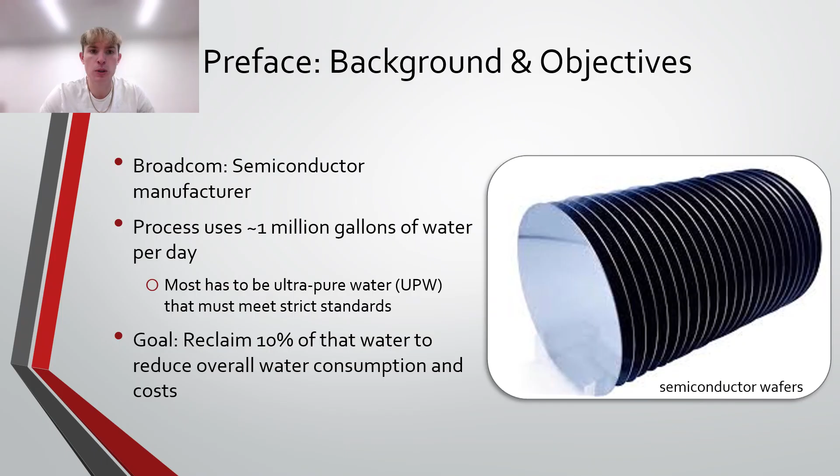Ultra-pure water must be used in most of these tools due to the high specification requirements of the semiconductor wafers, but it quickly becomes wastewater due to the presence of various contaminants either from the wafers themselves or other chemicals used in the process. The end goal for our team is to use the waste streams from the fabrication plant to reclaim 10% of the water in the process to reduce overall water consumption and costs.

Hello everyone, my name is Karina Zita. I'll be discussing the market and competitive analysis for our project. Ultra-pure water is one of the many main components utilized in the semiconductor fabrication process for the purpose of rinsing off any remaining residuals left behind on the wafer. Due to the semiconductor market growing over the past 2 years, the demand for ultra-pure water is also rising with the prediction to double by 2035.

The cost of production for ultra-pure water can be very expensive, as well as energy intensive. To mitigate these challenges, a wastewater reclamation system design will be implemented into Broadcom's ultra-pure water process. By increasing our water reuse, we are striving to stay competitive with top semiconductor industries, such as Intel and Texas Instruments, as well as reduce environmental impact.

Hello, my name is Caitlin Brennan, and I'll be walking through the team's schedule and budget for the past year. After initially convening and meeting with all of our advisors, the project scope and timeline were defined in September of 2025. Soon after, we moved into completing a market and competitive analysis where we looked into the semiconductor and ultra-pure water industries to determine that the project would provide a competitive advantage to Broadcom.

In November and December, the process was synthesized and described, which meant determining first which streams were viable options for reclamation, and second, how best to repurify them. Right after winter break, we jumped right into optimization and sustainability analysis in February and March, followed by a safety analysis, and following those results, controls design. Our presentation at E-Days and the subsequent submission of our final report will wrap up the project nicely.

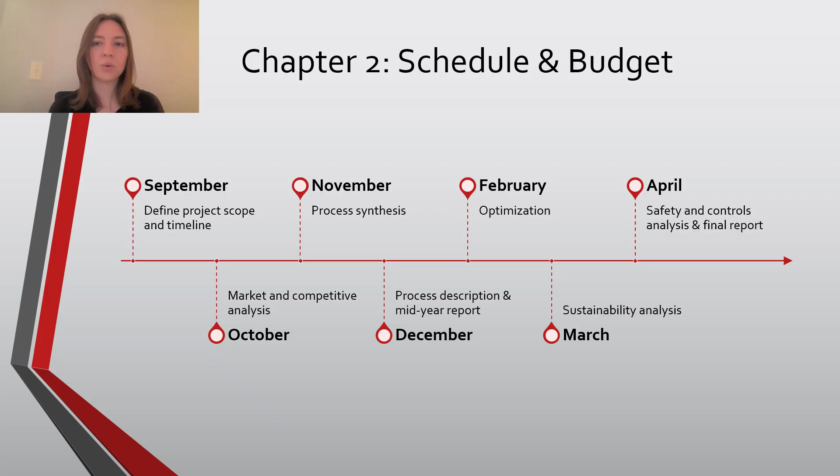We were initially provided with a $500 budget from CSU to help us achieve our goals, and Broadcom graciously offered to supplement where necessary. We didn't end up tapping into the resources CSU provided since the project is largely theoretical and design-based, but Broadcom did purchase and attempt to install a flow meter to assist in gathering flow rate data for our models. Unfortunately, with inconsistent flow through the pipes, an accurate reading was not able to be obtained from the meter. In conclusion, the budget provided by CSU remains untouched.

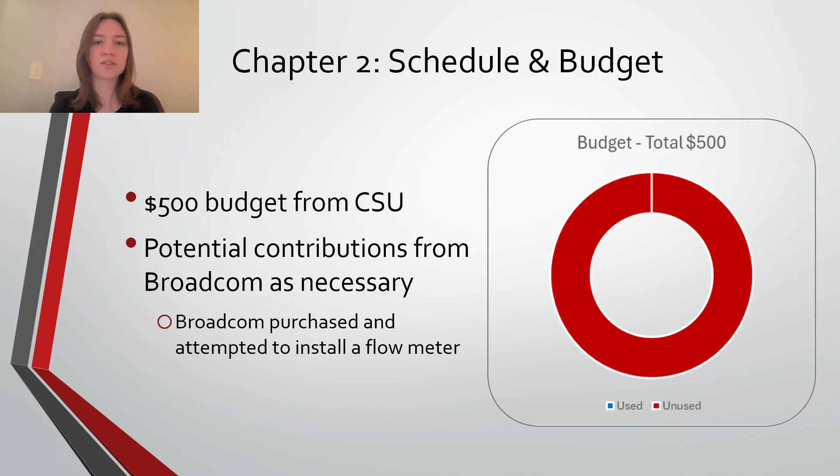Hi, I'm Adam Davis, and I'm going to talk to you about how we came up with our process for Broadcom. Initially, we were given a list of a bunch of waste streams to choose from to see which ones had the highest flow rate and which ones could be realistically treatable. From that, we chose 3 different streams, one that's an acid waste, one that's a copper waste, and one that is isopropyl alcohol. For the acid waste stream, we decided that we would use a neutralization reaction with calcium hydroxide,

where we send the acid water to a CSTR, neutralize it in there, and then send it to a clarifier where the waste will get settled to the bottom, and the UPW will go back to the Broadcom facility for further polishing. For the copper stream, it was simple, just a simple ultrafiltration membrane to remove the colloids from the copper, and so the ions will then get removed in the polishing step at Broadcom's facility.

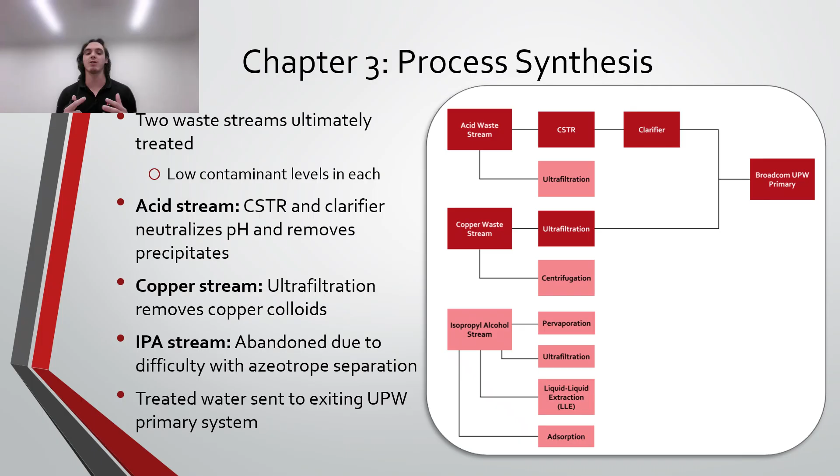For the isopropyl alcohol, unfortunately, we kind of had to give up on this idea because it became a very complicated process and there wasn't a lot of research done on how to separate the isopropyl alcohol from water in ways that we could feasibly do. So this is the actual design for our process from the 2 waste streams that we decided to move forward with, which is both the copper-rich stream and the acid-rich stream.

For both streams, they are going to initially enter a holding tank before they get pumped through to their treatment operation. For the copper, it goes into the storage tank, gets pumped to the UF, and then the retentate goes to the waste treatments, which would be like the sludge, and the permeate will then go to Broadcom's polishing step. Same for the acid waste stream. It goes into the storage tank, then gets pumped on through to the CSTR, where the neutralizer will then be added in to have the reaction happen, then is sent to the clarifier or settler tank, which will be cleaned out of the gunk, and the water will be sent to the Broadcom polishing steps.

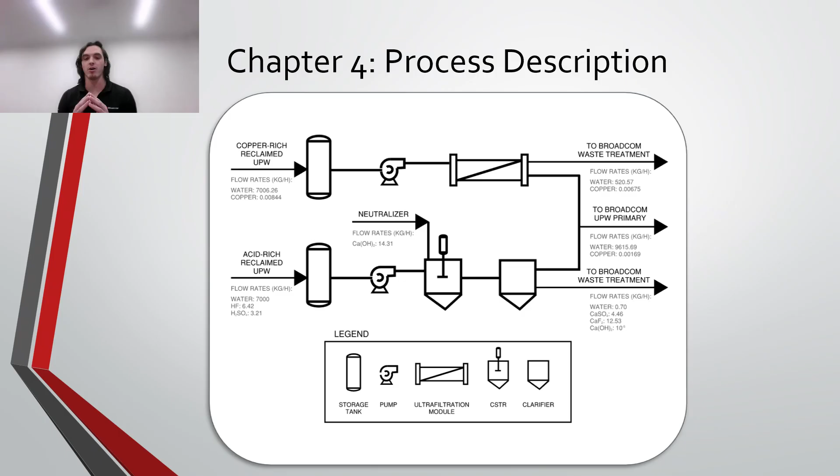My name is Peyton Musselman, and I will be going over optimization. Our main goals for optimization for the UPW reuse system were to increase efficiency and decrease cost. One of the first changes that were made was combining the two CSTRs into one larger tank to decrease cost, decrease the space requirements, and overall increase system efficiency.

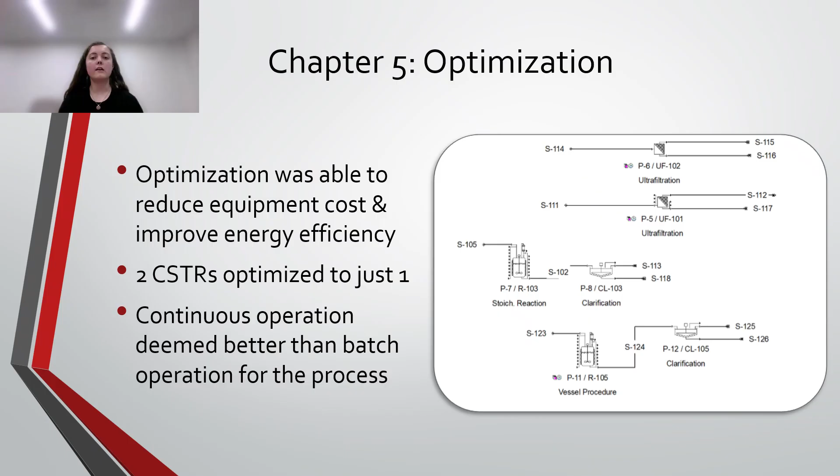The biggest change that was made was making the system continuous instead of batch. In the image shown, the first of each system is batch, and the second is the continuous operation. Continuous overall used less energy and thus lowered cost as a result.

For sustainability, we looked at the American Institute of Chemical Engineers' 7 sustainability indices, labeled on the radar graph below. They're the metrics that help break down the various areas of sustainability. A score of 1 is very unsustainable, while a score of 7 is the most sustainable a system can be with the current technology. The inner blue and outer orange lines show the UPW reclamation system before and after improvements to the process were made.

The main area of note is strategic commitment, as Broadcom currently has many policies in place that our system would hold to and thus would have a very high score for strategic commitment.

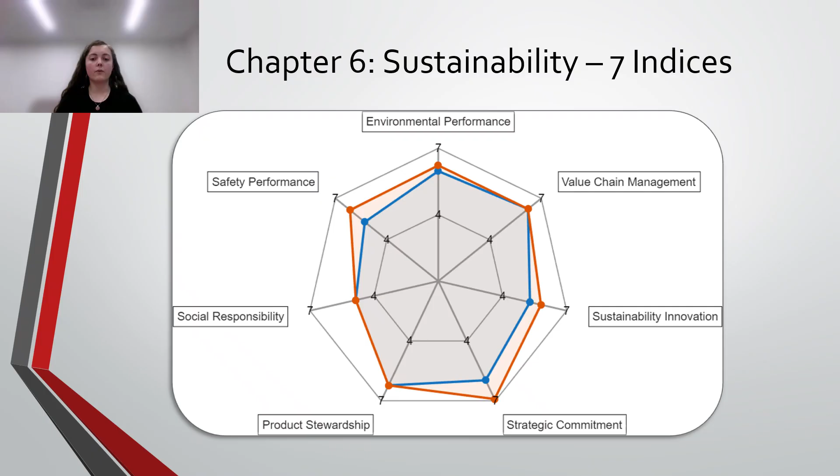Hi, I'm Jake Footit. The 3 pillars of sustainability give a more in-depth look into the core pillars of sustainability, which are economic, environmental, and social. This project shows little negative environmental impact, with the only carbon emissions coming from the power provided by the pumps and agitation, with no extra land being used to install the project.

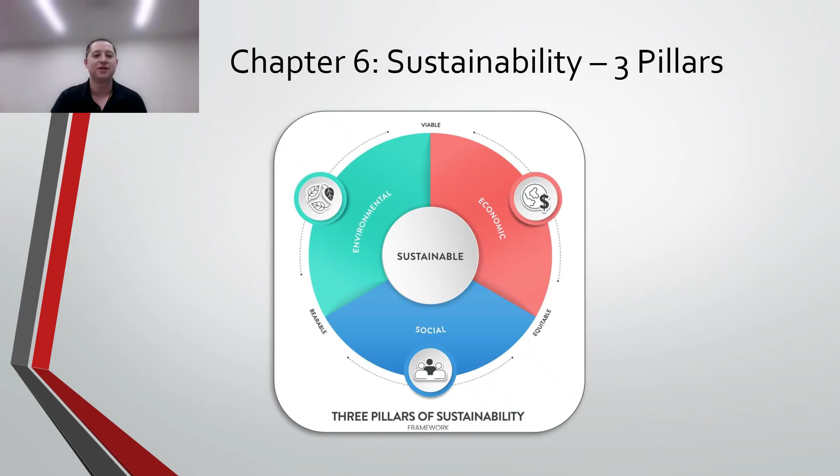This reclamation project does not negatively impact the communities surrounding Broadcom and will hopefully lead to jobs in the future. While further economic analysis is required, the financial upside of this project is near limitless, as there are many other streams that can be studied and recycled in the future.

Once again, my name is Caitlin Brennan, and I'm back to discuss the control system that was designed for the reclamation process. First, the 2 main storage tanks, as well as the reactor, were equipped with level control to prevent against overfilling and, in the case of the storage tanks, from running dry. Drains were also included on each major piece of equipment to allow for easy cleaning.

A nitrogen blanketing system was also added to most of the unit operations to ensure that bacteria and other contaminants do not enter the reclaimed water from poorly filtered air in the headspace of the equipment. pH control was added to the reactor to ensure that the right amount of the neutralizing agent is being added at all times, and also to determine whether the product is in the correct pH range to continue downstream.

Pressure control was added to the ultrafiltration module, and turbidity control was added to the clarifier. All of these controls together ensure the safety, efficacy, and efficiency of the reclamation system.

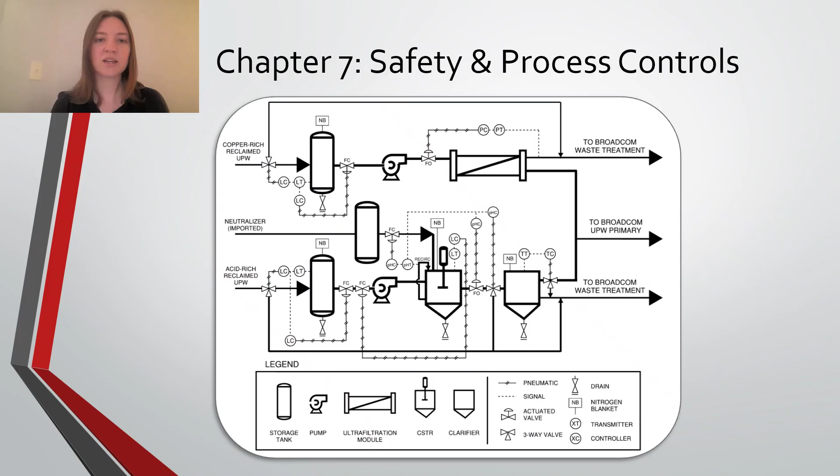This reclamation project shows it has economic viability. The sales being calculated is a mixture of the cost of water being saved by Broadcom through recycling, as well as the amount of water being saved by bypassing the beginning of Broadcom's current purification system.

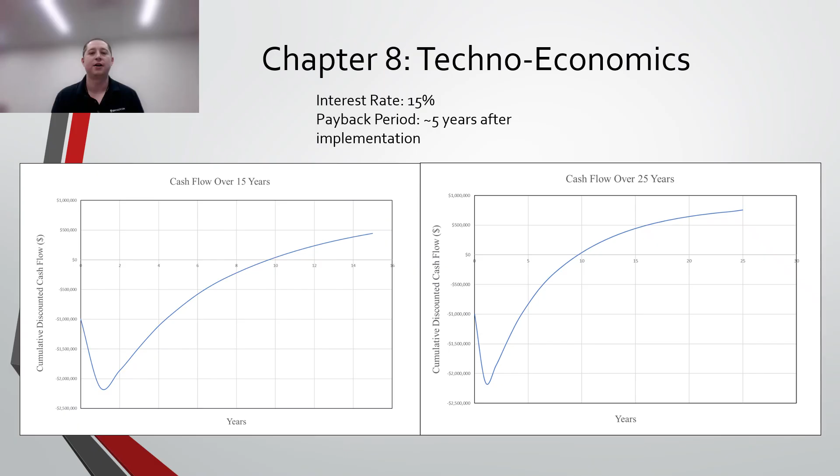And to get these estimates for how much money the reclamation system would make if proper maintenance was done, or that 25-year metric, and if little maintenance was being done on the equipment, that 15 or minimum year metric, these graphs show that after the initial building, a payback period of about 5 years can be found, with the longer lasting equipment showing a higher net profit over time.

Hi, my name is Marion Katzerbauer, and I will be wrapping up our presentation today. While only around 6% of the target water was saved, the system has been proven to be cost-effective and feasible to be implemented into Broadcom's facility.

While the original target was not met, further research into IPA recovery would end up over-exceeding the 10% recovery that was originally targeted. Overall, the system has been proven to be effective sustainability-wise, and operation controls would guarantee specifications would be met.